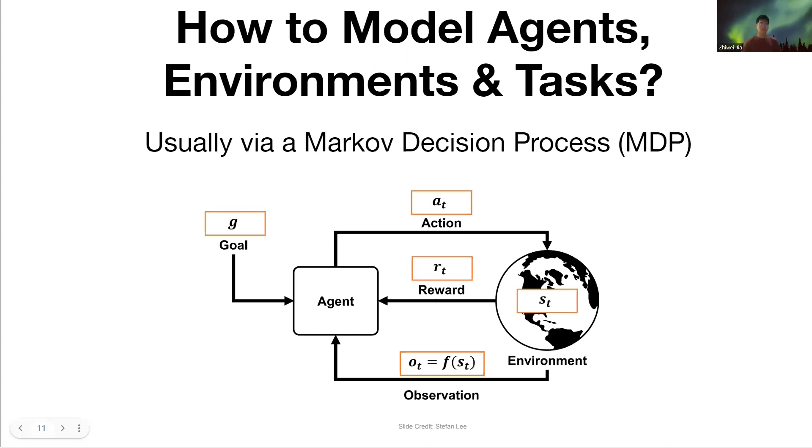For instance, in a navigation task, the rewards can be the minus distance between the robot and the target location. As you will see soon, many modern embodied AI work relies on the use of virtual environments. So let's ask a question. Why do we need virtual environments? Well, it turns out that learning in virtual environments has several major advantages over learning in real world.

It is much safer to perform experiments in virtual environments. And it is much more affordable and therefore scalable to train agents in virtual environments. For instance, it is very risky to collect self-driving car data in real world. And it is not very affordable to have hundreds or thousands of physical robot arms, which is easily available in simulated environments.

Okay, now that we know why we should use virtual environments to study embodied AI, let us go through some of its key factors. We will first start with simulators. So what is a simulator? A simulator is essentially physics simulation plus sensory signal rendering.

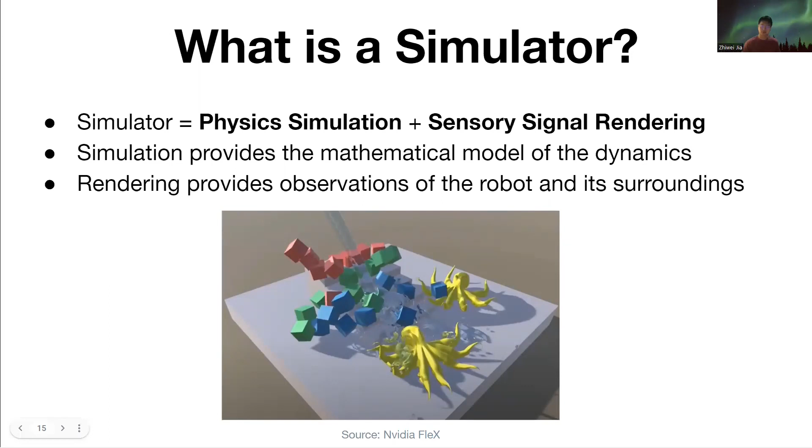Well, there are so many existing simulators used for embodied AI research. To make your life easier, we would like to introduce several important things for you to consider when choosing a simulator to use. These factors include rendering, physics, speed of the simulators, their supported object types and properties, how they model actions, and also what kind of human interfaces they can support. We'll go through these factors one by one.

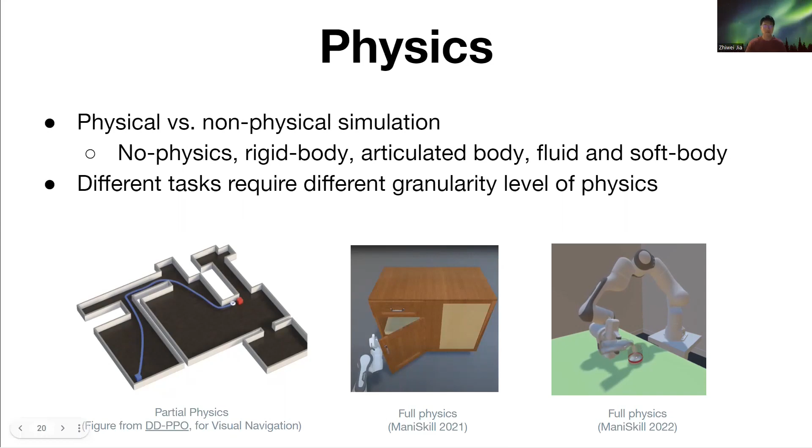Another important factor is speed, which refers to how fast the agent can interact with a simulated environment. This is quite important because it can affect what kind of training approaches are viable for the simulators. For example, you can do imitation learning with very slow simulators because it does not require a lot of interactions.

While you can do model-based reinforcement learning with relatively slow simulators because the agent can use its internal world model to reduce dependency on interactions. But for model-free reinforcement learning approaches, it usually requires you to have a very fast simulator since you're gonna need a lot of simulation, a lot of interactions.

So you might be curious, what are the factors that can have an impact on the speed of simulators? Well, the most obvious one is, of course, the speed of the underlying engines. But there are actually other factors that make optimizing or estimating the speed of a simulator quite tricky. For example, how complex the geometry is in your environment can have an influence on the simulator speed.

Is the interaction of a coarse or fine level? For example, a high-level action is much faster to simulate than a low-level action. Or even, what is the resolution for the rendered images? Typically, a larger resolution can slow down the simulation by a lot.

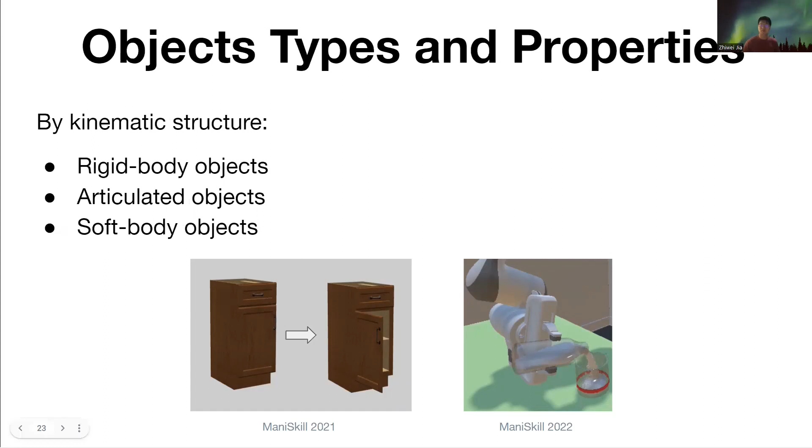Another example is peeling or cutting properties of food or materials in general in VR kitchen. And you can see there is actually a fine level of state changes here. Finally, the example of temperature modeling is provided in the iGibson 2.0 environment.

After introducing the actionable properties of objects, let's finally talk about the actions themselves. So the types of actions supported in a simulator sort of depend on 3 different things: the types of simulation, the types and properties of the objects, and also the types of the robots. So we've already covered the first 2 points in the previous slides. Now let's talk about the third one, the robots.

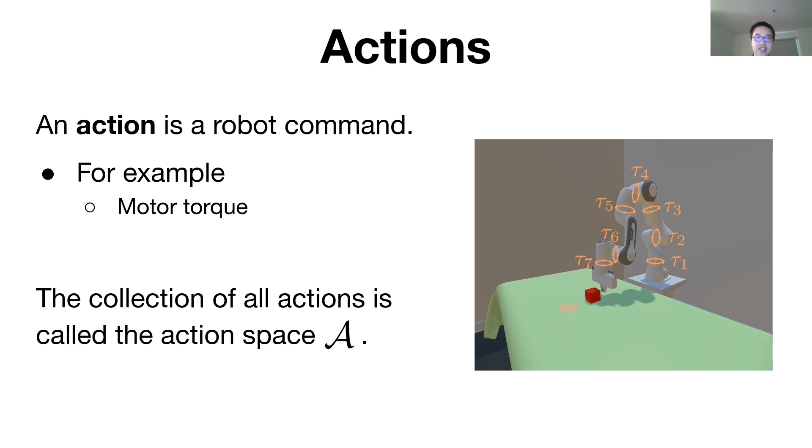Similarly, we define the robot command as an action. For example, here, the action can be the motor torque, which is used to control the robot. We call the collection of all actions the action space A. Next, we can also use a transition function T to describe how state changes over time according to an action. Formally, T describes the rate of change of the state, given the current state and action. In our robot example here, T is governed by classical mechanics.

The two examples have shown us that we can model the world with the three tuple S, A, and T. We call this the forward model. S is the state space, which includes all possible world states. A is the action space, which includes all possible control signals. T is the transition function, which describes the environment dynamics.

For what we have seen so far, the states are changing continuously, but on a computer, things are discrete. Here, we can discretize the transition function over time. Now, we can write s_t+1 is equal to a discrete time transition that takes s_t and a_t. And in general, the transition can be stochastic. That is, the transition function gives the distribution of the next state instead of a deterministic one.

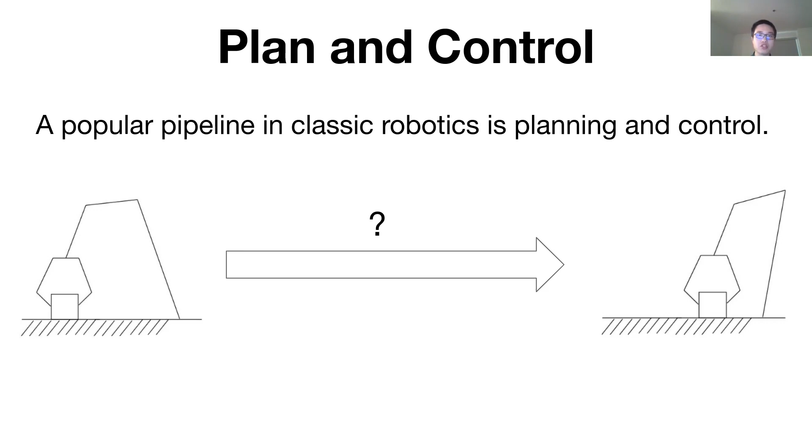Now, let's move on to classic robotics. A popular pipeline in classic robotics is planning and control. For example, if you want to move a block from the left to the right, we will first use motion planning to generate a trajectory, that is, a position, velocity, and acceleration sequence of the robot. We will then use control to execute this trajectory.

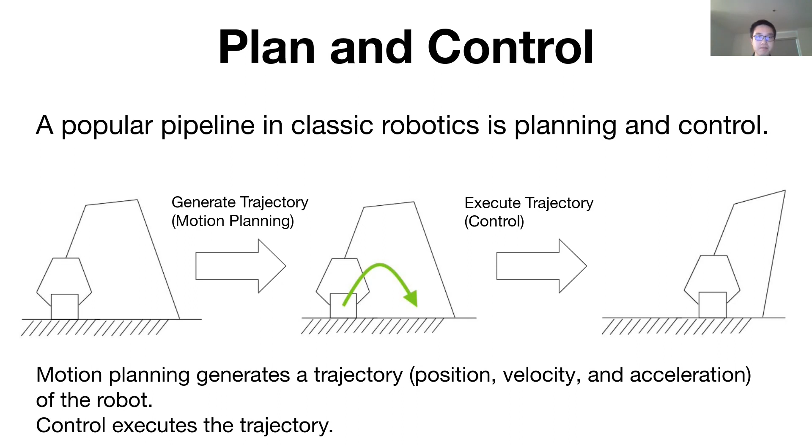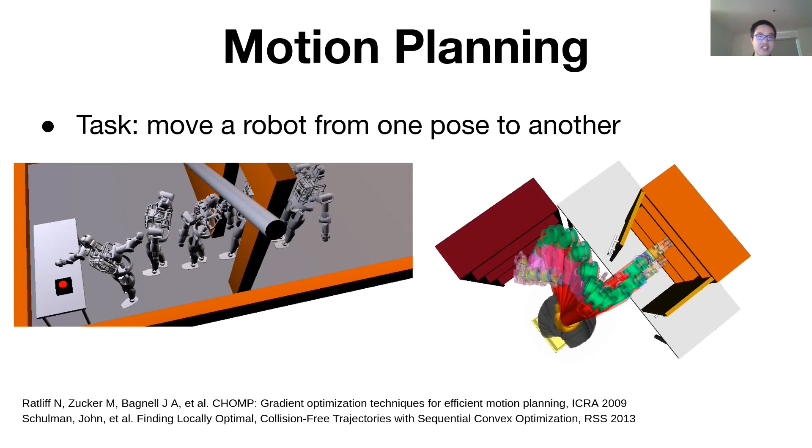Let's first talk about motion planning. Motion planning tries to solve the task of moving robots from one pose to another. In motion planning, we assume that we know the start and the goal of this robot. We also assume that we can verify if a random pose is valid. That usually means collision-free. We also need to be able to verify whether a pose is reachable from another pose using some simple control strategy.

Common algorithms of motion planning include the Rapidly-exploring Random Tree algorithm, or RRT, and the Probabilistic Roadmap Method, or PRM. Next, I'll take PRM as an example. This is a two-phase algorithm. The first phase is map construction. We will first randomly sample collision-free configurations, then connect every sampled state to its neighbors, and also connect the start and goal state to the graph. The second phase is the query phase. Here, we can just find a valid path using some simple search algorithm like Dijkstra.

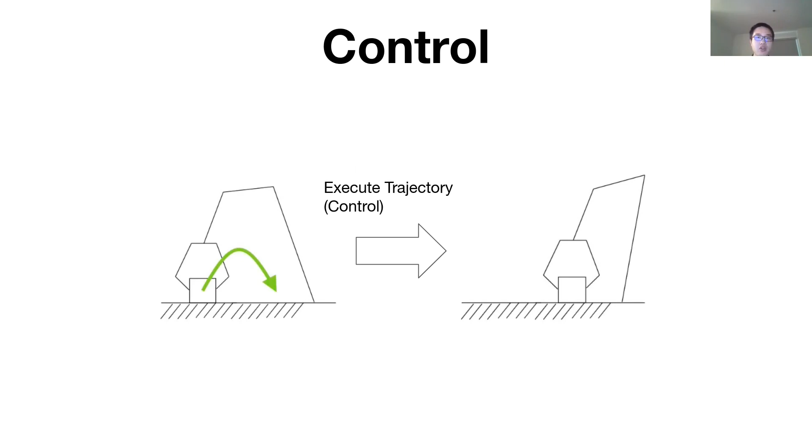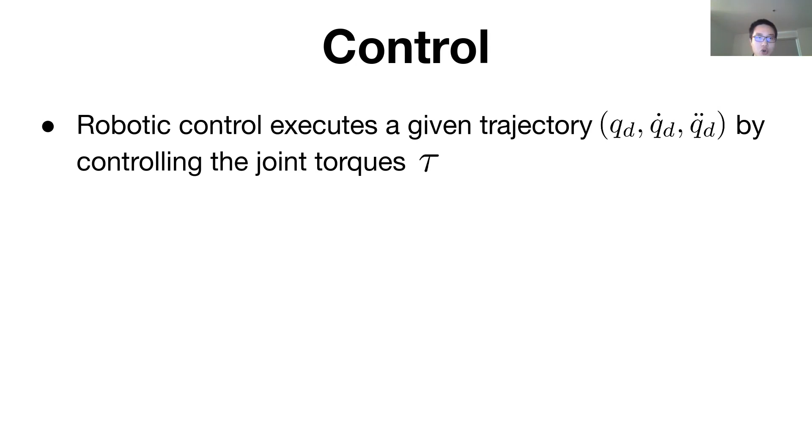With the trajectory generated, we are now ready for control. Robotic control takes a given trajectory and tries to follow it by controlling joint torques tau. Similar to F equals ma, the dynamics of a robot is known.

The process of inferring joint acceleration from joint torque is known as forward dynamics. And the process of finding the proper torque from desired joint acceleration is called inverse dynamics.

We can see inverse dynamics consists of 3 terms. The first term is similar to F equals ma, but here M is replaced with the inertia matrix. The second term only has effect when the robot has non-zero velocity, modeled by the Coriolis matrix. The third term summarizes effects of external forces, such as gravity.

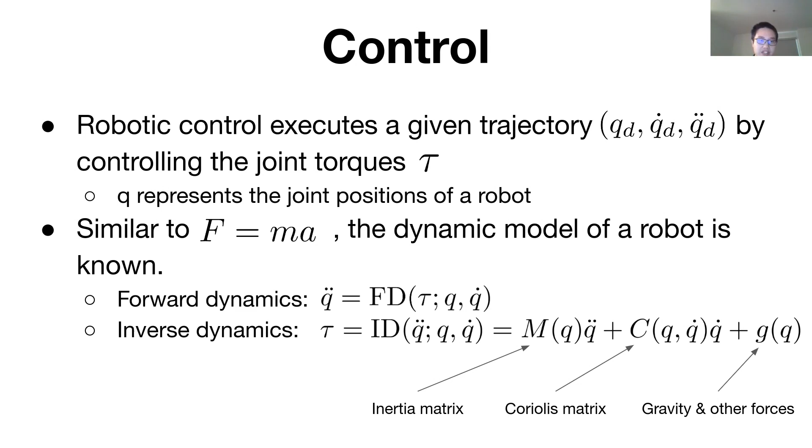Now we know the desired acceleration from the trajectory, and we have the formula for inverse dynamics. Ideally, by computing tau from the desired acceleration, we should get a perfect trajectory. However, the real world is not perfect. So what if there's some error on the joint position?

To mitigate this error, we can use another control method called PD control. In PD control, the applied torque is proportional to the velocity error E dot and positional error E. Intuitively, when the position lags behind, we just increase torque to catch up with the position. And similarly, if the velocity is too slow, we also increase the torque to catch up with the velocity.

We can see that here, inverse dynamics is not used at all. So is there any problems? Well, it turns out that the PD control does not guarantee the convergence of E. And even when the error converges, it is often non-zero.

The way to fix it is by combining both inverse dynamics and PD to form the augmented PD control, where PD is only used to mitigate the residual error from the inverse dynamics controller. The augmented PD control will converge to zero error if the robot is modeled correctly.

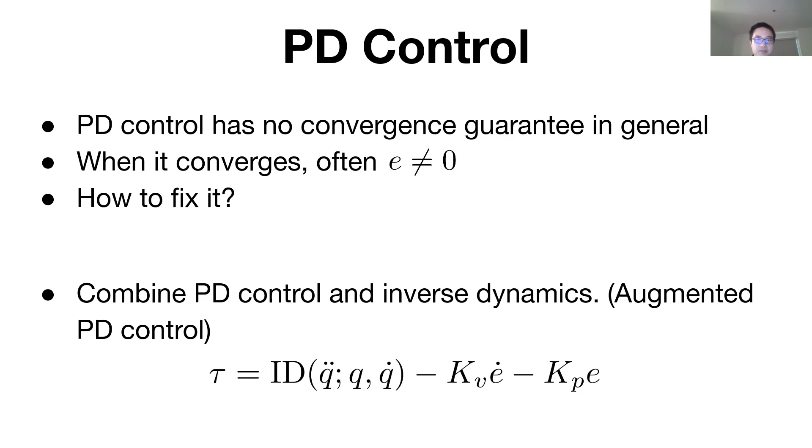Another way to correct any steady-state error is by adding an integral term to the PD. This is called the PID control. And there is also the augmented PID controller, which is more tolerable to inaccurate modeling of the inverse dynamics.

Now let's see an application of PD controller in embodied AI environments. You may hear people say that their environment uses a PD velocity controller. What does that mean? It really means that we are trying to use a PD or augmented PD controller to follow a constant velocity trajectory.

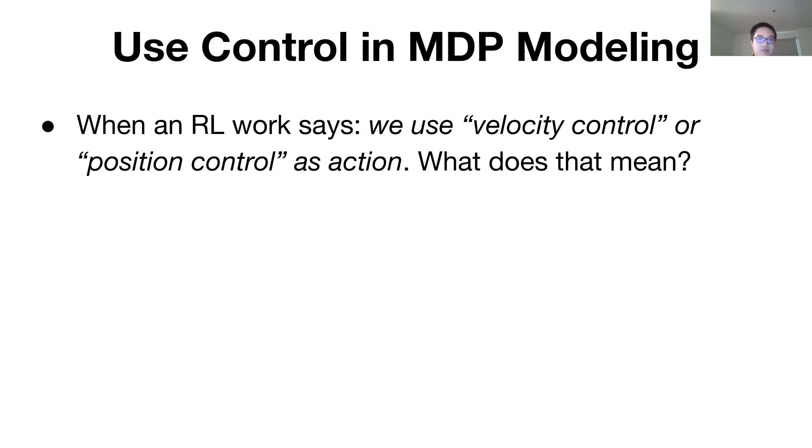Control can also be used in MDP modeling. You may see in the RL paper claim we use velocity control or position control as an action. What does that mean? Here, they're really saying the action in the MDP is target joint velocity or target joint position for a controller.

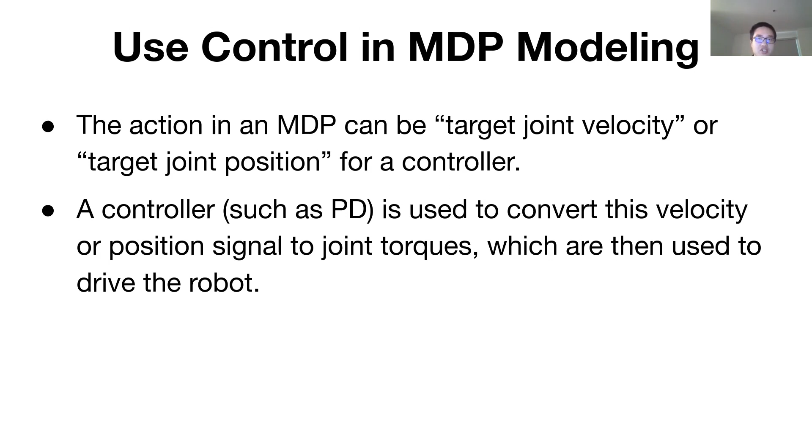A controller such as PD is used to convert this velocity or position signal to joint torques, which are then used to drive the robot. They make this design choice because velocity or position may be a better choice for MDP action due to learnability and sim-to-real transferability.

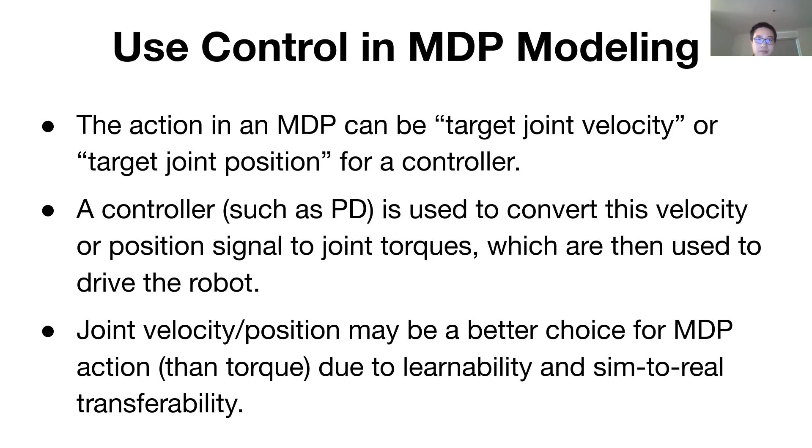To conclude the control part, I'd like to mention that control is a huge topic. Most control methods focus on the stability and robustness. There are many branches, such as optimal control, feed-forward feedback control, robust control, self-organizing control, and stochastic control. Optimal control also has a strong connection with reinforcement learning.

Okay, let me summarize embodied AI approaches here. First, there are learning-based methods, including imitation learning, which uses expert demonstrations, and reinforcement learning, which improves policy with interaction experiences.

Next, in classical robotics, we have introduced motion planning, which moves the robot between configurations, and control, including PD controllers and its variants.

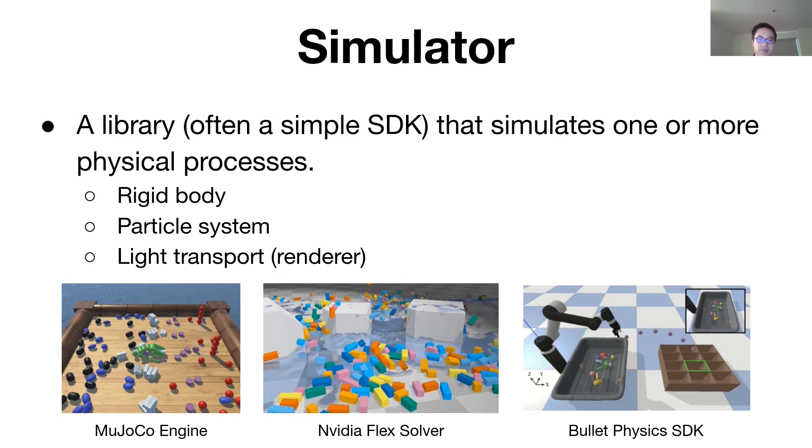Next, we call a software that bundles together simulators to help developers an engine. For example, the game engine Unity, Sapien, and PyBullet. Many people do not make the distinction and would call all these engines a simulator.

Next, when we say environments, what we really mean is bundles of engine or simulator assets and tasks for studying specific embodied AI problems, such as AI2-THOR, ManiSkill, or AI Habitat. Do note that many people will still call environments simulators. So the real content of a simulator really depends on the context.

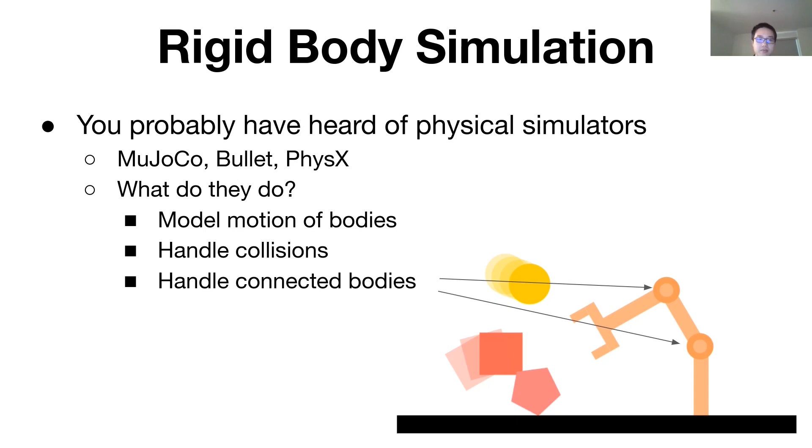In fact, most rigid body simulators repeat the following steps: integration, collision detection, and constraint solving. These steps happen within the step functions of simulators, such as PyBullet's step simulation function and Sapien's scene step function. Let's take a look at them in detail.

First, integration refers to advancing the simulation time and updating simulation states. A very common choice is the semi-implicit Euler integrator. That is, update the velocity with acceleration and update the position with the new velocity.

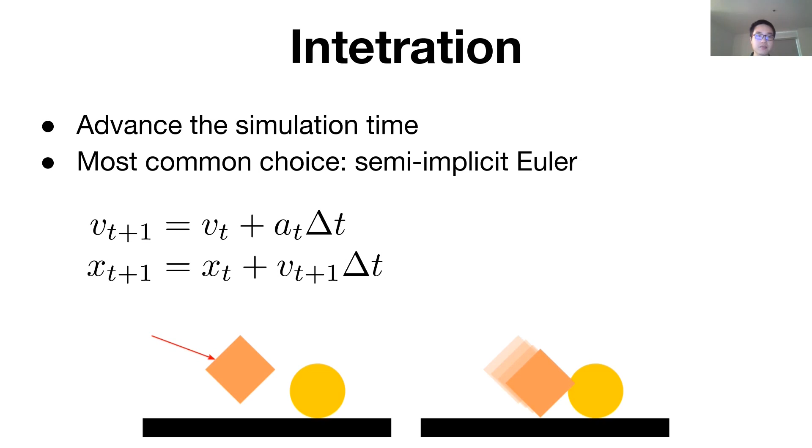Collision detection refers to the process of finding contacts between bodies. The collision detection algorithm finds the contact positions, normals, and penetration distances, then adds them into the list of constraints for the solver later. The collision module is often completely separated from the constraint solver module.

The constraint solving makes sure no physical restrictions are violated. For example, bodies connected with joints should move correctly, and bodies in contact should not penetrate each other. The constraint solver solves a system of equations or an optimization problem to figure out a proper force or impulse to add for each constraint. A key parameter is the solver iterations, which indicates how long the solver is allowed to run, and can greatly affect the stability of simulation.

Next, let's talk about camera simulation. Camera simulation is achieved by rendering, which tries to model light transport. Important components in camera simulation are cameras, lights, geometries, materials, and textures.

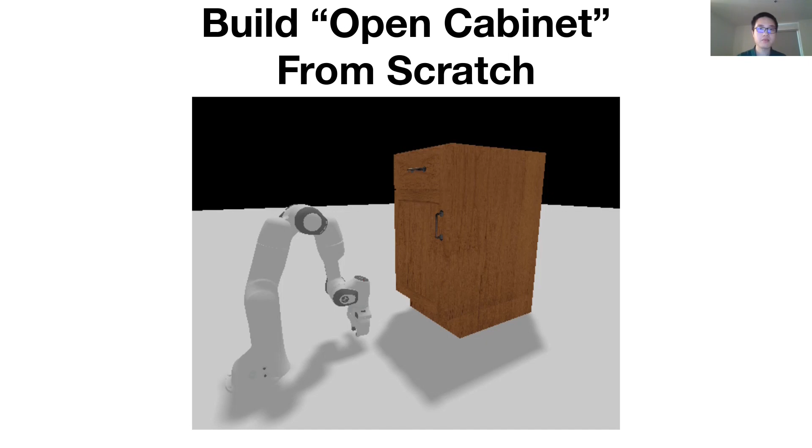First, we need to decide the task. Here, our task is to open the door of a cabinet with a robot arm.

Next, we need to decide the assets. We can use this cabinet and robot shown here. They are both in the URDF format.

Next is to decide the controller. The options include torque control, PD velocity control, a combination of controllers, or non-physical processes such as teleporting the arm. Here, we will show PD velocity control.

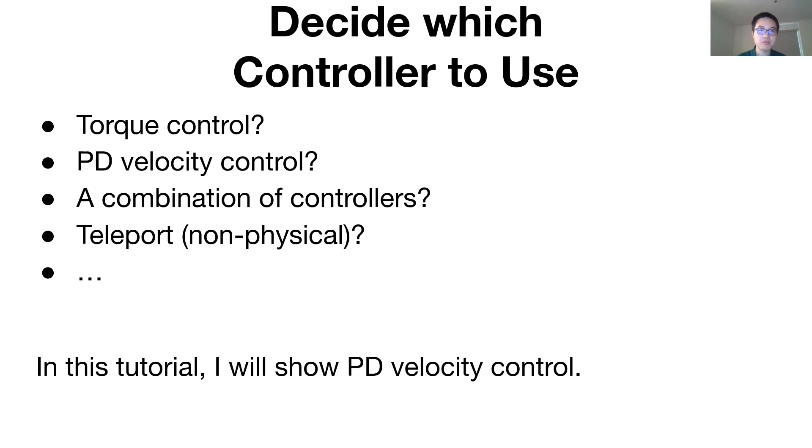Next, we decide the type of object interactions. How will the robot open the door? We can use physical processes such as force and friction. Or we can use a simplified model: glue the robot to the door when it is closed.

Or we can make the door opening even simpler: it opens automatically when the gripper is closed. The choice really depends on the scope and definition of tasks, and all the choices above can be useful in certain situations. Here, we will show the physical process.

Next is to decide the observation space. Should we use some simulation state? Should we use an RGBD camera? Or maybe both? Here, we will use the RGBD camera plus the robot state.

The next step is to choose a suitable framework. Here we use Sapien. First, because we made it, and it has a very good debug viewer. It also has a clean API, type hints, and code completion. So it is very suitable for education.

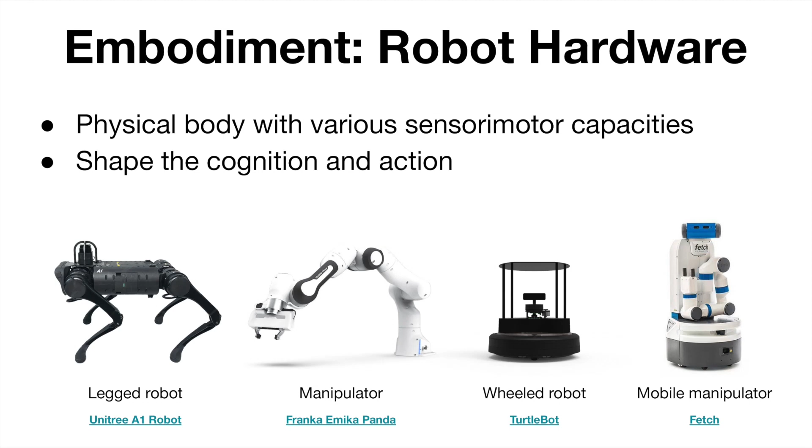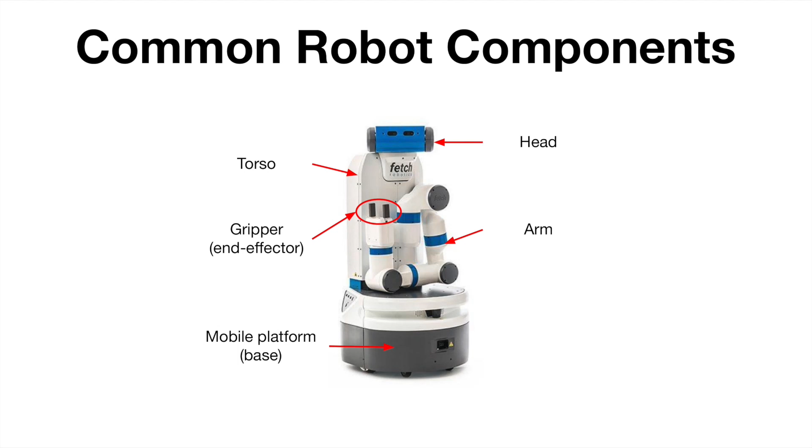Take the mobile manipulator Fetch, for example. It consists of a mobile platform, a head to mount cameras, a torso that can lift, an arm with 7 degrees of freedom, and a 2-finger parallel gripper.

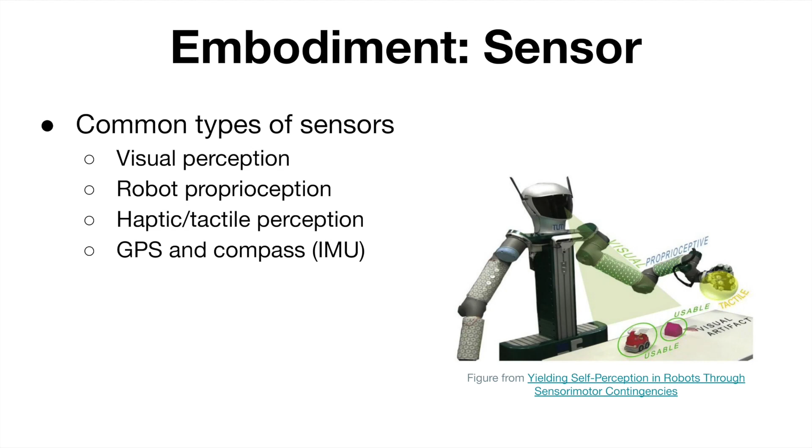Next, we will discuss sensors. There are several common types of sensors. For example, a robot can use mounted cameras to perceive visual information. It can make use of its motor drives to perceive the movement of its arm, which is a kind of proprioception. And it can also leverage GPS and a compass to perceive its ego motion. If the robot hand is equipped with force sensors, it is able to perceive tactile information as well.

Visual perception includes RGB and depth images, semantic and instance masks. There are also other types, for example, normal and optical flow. Apart from types of signals, placement is also an important factor. Commonly, cameras are mounted on the head and arm of the robot, or at a fixed position relative to the robot base. Different camera placements can affect cognition. For example, the arm camera can provide a closer look at the target to manipulate, with less occlusion.

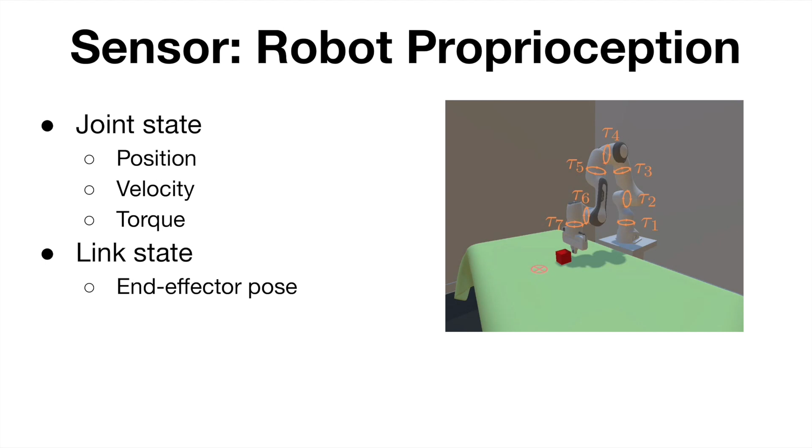Proprioception refers to perception or awareness of the position and movement of the body. It usually includes the joint states and end-effector pose. To manipulate objects, it's helpful to know the contact between the gripper and the object. We can check whether the gripper is grasping something by measuring the contact force in the simulation. There also exist force-torque sensors, which can measure external force and torque applied to a joint.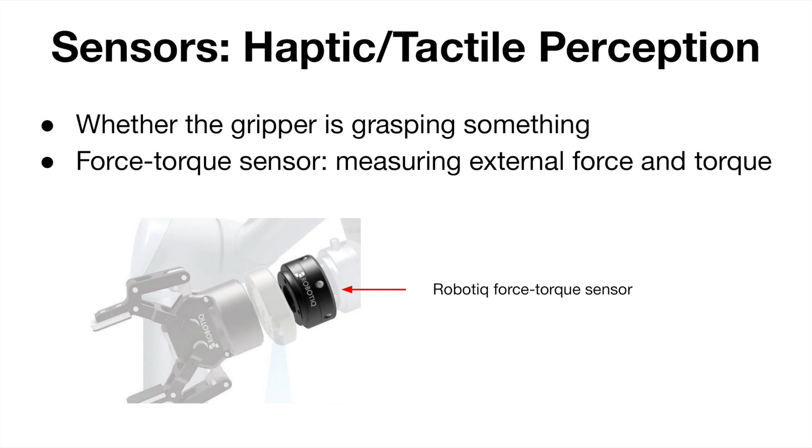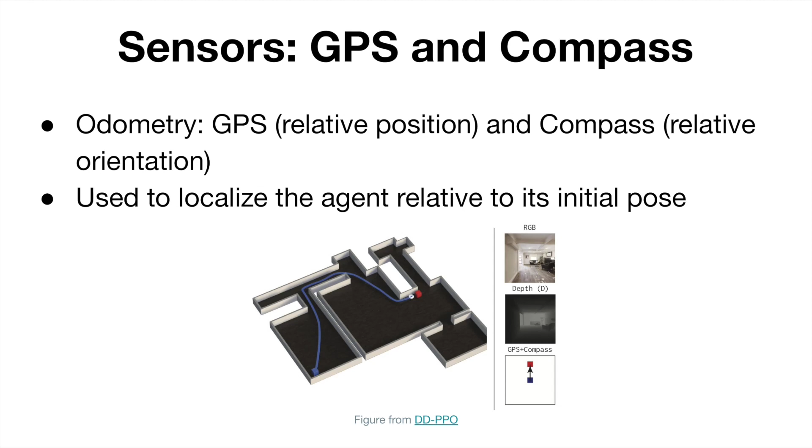GPS and a compass are widely used in navigation tasks to provide ego motion information. They enable the agent to localize itself relative to its initial pose. We summarize design choices for sensors here. We have briefly discussed the types and placement. In addition, specification is taken into consideration sometimes as well. An example is the camera resolution.

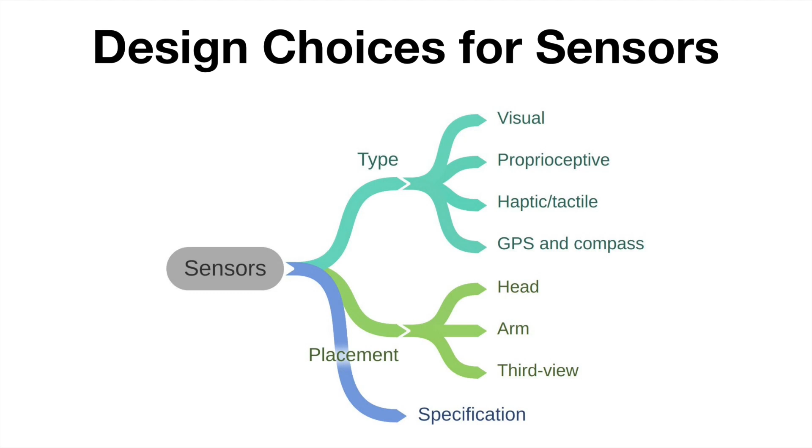Next, we are talking about actuators. An actuator is a component of a machine that is responsible for moving and controlling a mechanism or system. An actuator takes an input command from the agent and outputs commands to the simulator to control the robot. For instance, the input command is move forward, and the output command can be to set the base position 0.2 meter forward along the x-axis. Besides, the output command can be low-level physical signals. For example, 10 Nm of torque applied to the wheel joint.

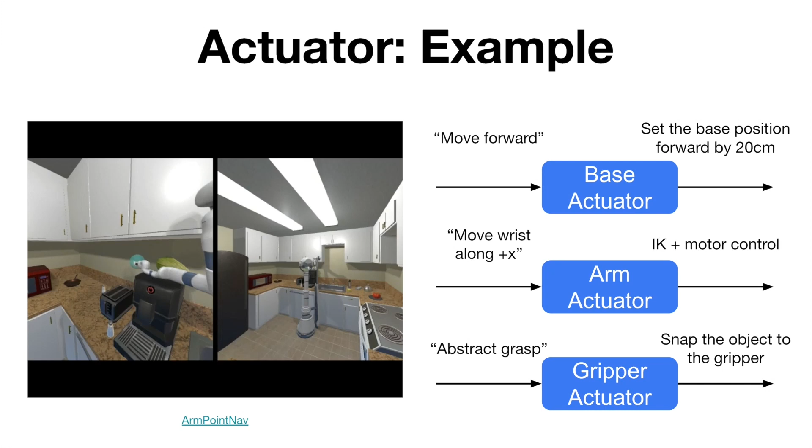Here, we show an example of actuators implemented in ArmPointNav. The base actuator takes a discrete action as input, say, move forward, and sets the robot pose to a pre-computed navigable grid position on the floor. This process is non-physical. Similarly, the arm actuator receives a discrete action, say, move wrist along the positive x-axis. It then computes the target joint positions by inverse kinematics and controls joint motors to reach those positions. The gripper actuator is implemented as a magnet, and the object can be snapped to the gripper if they are close enough. This process is non-physical as well.

Next, we are talking about task specification. It includes goal specification and how to define success metric. The task is considered completed if the goal is achieved. In general, the goal should be provided in or perceived from sensory information. We list several common types of goal specification, including geometric position, object category, semantic or instance masks, language instruction, goal image, successful demonstration. For example, a goal specified by a language instruction can be a sentence, say, find white mark. The agent needs to parse the goal, navigate through the room, and recognize the white mark.

We also need to design a success metric to measure whether the goal is achieved. For example, a navigation task is completed when the agent stops close enough to the goal, and a manipulation task is accomplished when the pose of the target object is close enough to its goal. Sometimes, additional requirements need to be satisfied, especially for manipulation. For instance, the robot should be static or successfully reset its arm.

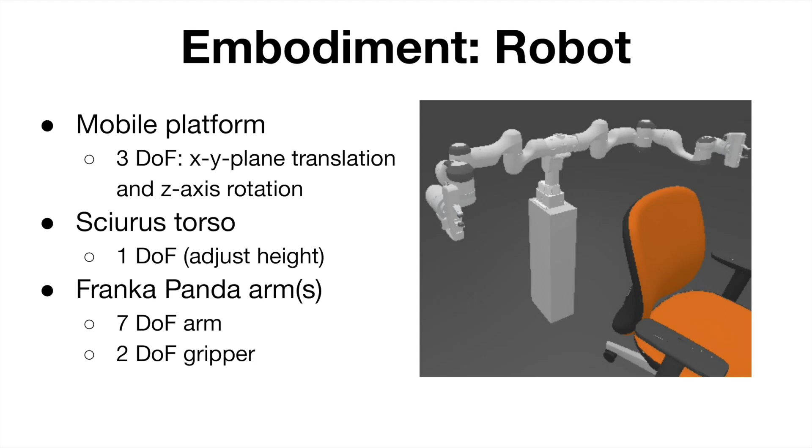RGBD images and semantic masks are provided. Specially, ManiSkill uses 3 cameras mounted on the top to provide a panoramic view. Other non-visual sensors include proprioceptive sensors for joint positions and velocities, as well as GPS and compass sensors for ego motion. Besides, it provides a point cloud fused from observations of all 3 cameras.

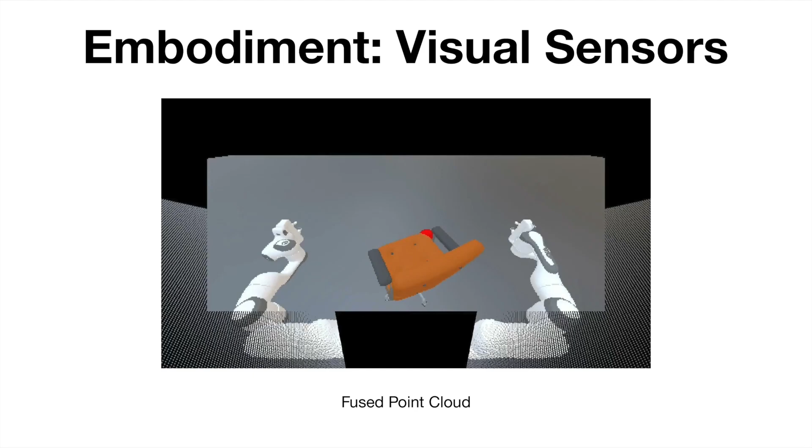ManiSkill uses a continuous action space, which corresponds to the target velocities of controllable joints. The actuator output is torques applied on joints to achieve those target velocities. Such an actuator is equivalent to a PD joint velocity controller in robotics. It relies on full physical simulation without abstraction.

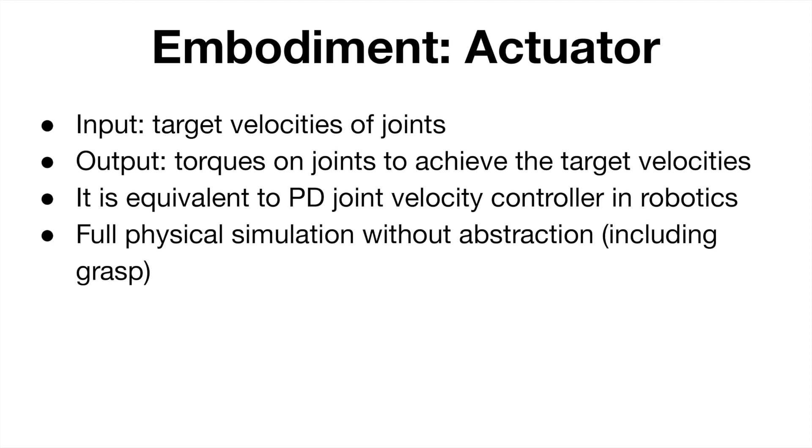ManiSkill introduces 4 challenging manipulation tasks. The first 2 tasks are open cabinet door and open cabinet drawer. The objective is to open the door or drawer. The target link is specified by the semantic mask.

The other two tasks are push chair and move bucket. The objective is to move the target chair or bucket to the goal position. The goal position is specified by a visual indicator, either a red point or a white platform. The agent needs to infer it from observations.

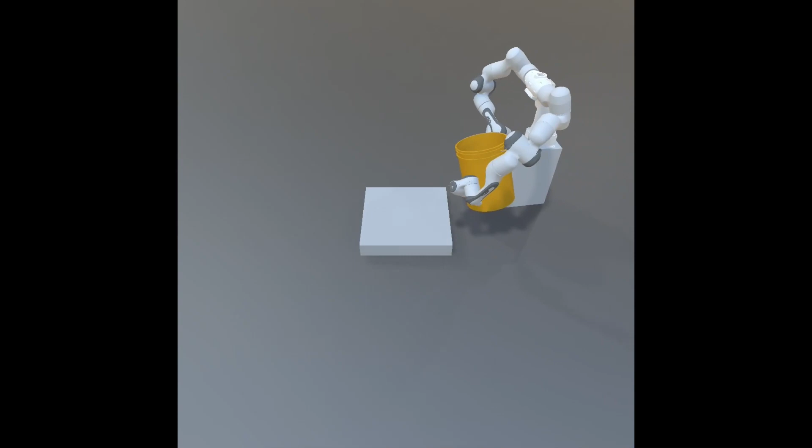ManiSkill uses 162 objects over 4 categories from the PartNet-Mobility dataset. Large diversity of articulated objects is one of its features. Moreover, we would like to discuss some soft body tasks beyond rigid body simulation. ManiSkill is going to introduce soft body-oriented tasks. The embodiment is the same, except for specially designed end effectors. We will focus on goal specification in the following slides.

The task Write is to write a target shape in clay with the stick mounted on the robot hand. The goal is specified by a top view RGBD goal image to indicate the target shape to write. The task Pour is to pour a certain amount of water into the beaker. A red marker indicates the desired fill level. The task Excavate is to excavate a certain amount of clay from the container with a mounted bucket. The target scooped mass is specified by a scalar.

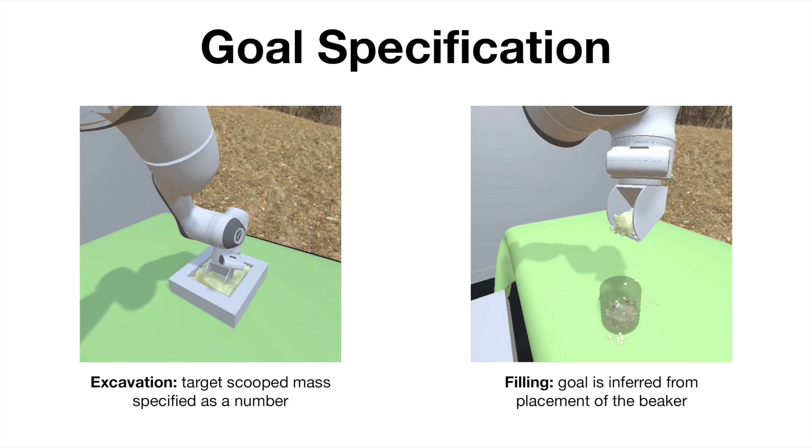The task Fill is to fill the beaker with some particles. The goal position to fill needs to be inferred from the placement of the beaker. The task Rolling Pin is to roll over dough to shape it into the target size. The goal is specified by a target bounding box of dough.

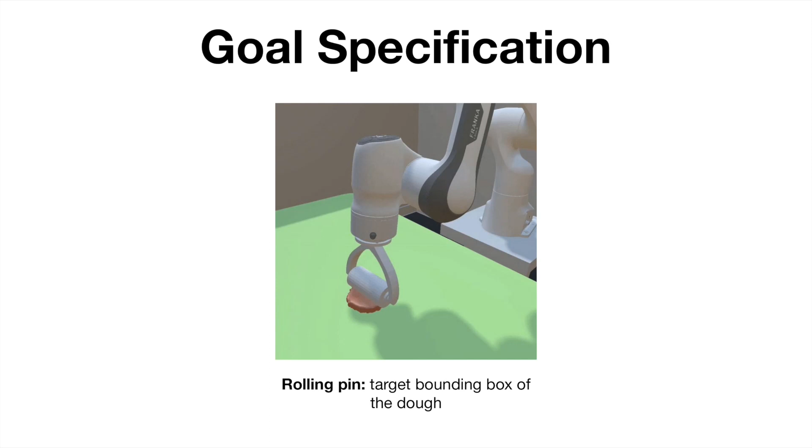To build a soft body-oriented environment in ManiSkill, we gather different types of assets, including customized robot end effectors and rigid body containers. Soft body assets are represented by particles, and their physical properties have been tuned to meet our expectations.

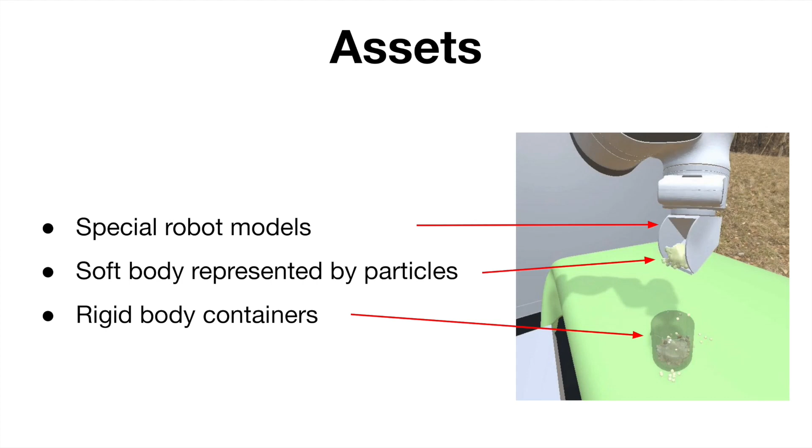To summarize, different embodied AI environments have different levels of abstraction about the physical world, and are suitable for different tasks. Habitat 1 and AI2-THOR are suitable for navigation and language grounding. Habitat 2 and ManipulaTHOR are suitable for mobile manipulation. ManiSkill focuses on physical manipulation and object-level generalization. We hope this tutorial will help you find a suitable environment to start your own journey with embodied AI, or have a better understanding about designing an embodied AI environment.

Hi everybody, welcome back to part 4 of the Building and Working in Environments for Embodied AI tutorial. In this part, I'm going to introduce the experiences and practices to debug simulators.

Simulations can produce many unexpected behaviors. For example, the gripper may penetrate the cube that it's trying to grasp. The robot may penetrate objects like the oven here. And some complex mechanical structures may be simulated incorrectly, like shown in the third picture. And for some objects, the collision shape may look very different from their visual appearances.

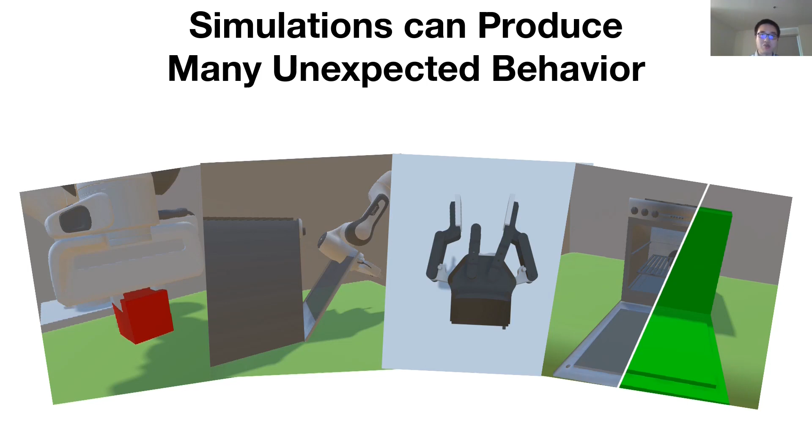In this section, I'm going to talk about how to debug and work with these kinds of issues and how to improve the environments. First, I'm going to talk about how to identify potential problems when a simulation environment behaves unexpectedly. Next, I'm going to talk about how to debug and improve these environments. This section is mainly for people with some experience in embodied AI.

This section is divided into 6 topics: conventions in robotics, simulation assets, physical solver, renderer, controller, and some comments on environment speed. Let's get into the first cause of common bugs, the conventions in robotics. Here, I will talk about 4 topics: quaternion representations, Euler angle representations, default coordinate frames, and joint order of different software and real robots.

So, quaternion representations. As you may already know, quaternions are very commonly used to represent the rotation of rigid bodies in simulators. But there are 2 very common conventions in use in popular software. The first is the XYZW convention, or vector-first convention, where the XYZ component is placed before the scalar component of the quaternion. This convention is used in ROS, PyBullet, PhysX, SciPy, and Unity. As you can see, they are all very popular software.

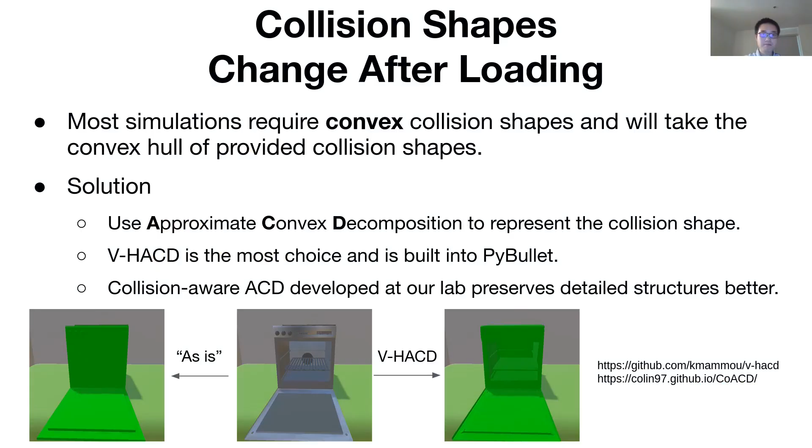Let's move on to the next issue that is caused by small mass or inertia. So sometimes a loaded object does not respond to any applied force or torque. And in this case, maybe it is because the mass or inertia of this object is just too small, and the simulator may choose not to simulate it, or maybe the floating point error is too large and the simulator cannot handle it.

Here, I have a script for that. I'm setting the density of this robot to be very low, so these two robot fingers would have an extremely small inertia. Let me try to drive these fingers. Here in SAPIEN, I can easily drive these fingers by sliding this slider. And as we can see, I'm trying to drive this finger, but it's not moving, and that's not expected behavior.

Here, I'm printing the inertia of those fingers. As we can see, they are very small. To solve this issue, we can simply try to increase the mass and the inertia to see if the object starts to behave. And I would recommend making the mass and inertia greater than the 1e-7 scale.

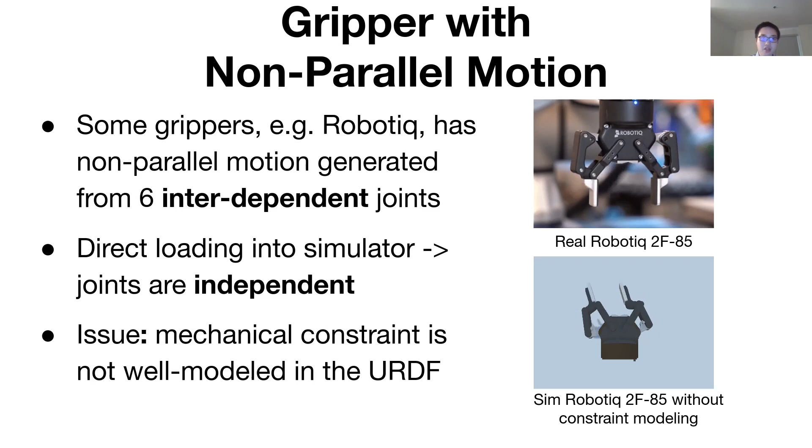So for these kinds of grippers, we will want to manually add some constraints after loading these models. For example, here, for this Robotiq gripper loaded in SAPIEN, we have manually added position constraints to connect the inner part and the outer part of the fingers together. So we can model these kinds of loop constraints correctly. However, do note that these loop constraints may bring a little bit of instability into simulators. So you should always be cautious about using such tricks.

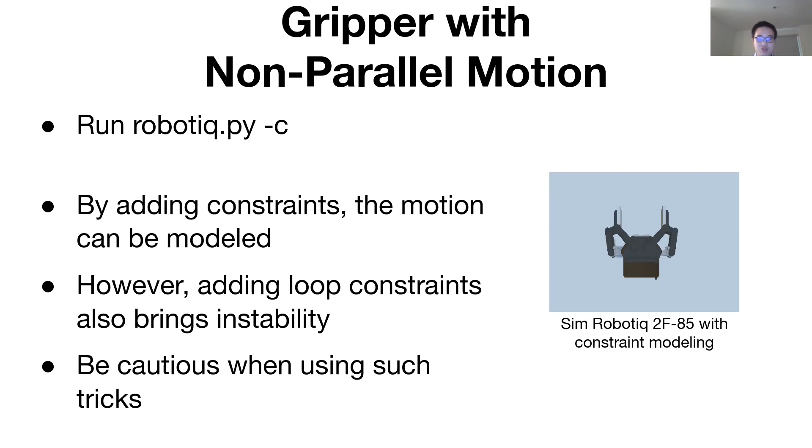And the next topic is about balancing passive force. We sometimes get the question: my robot never reaches target positions, are my PD controllers bad? Well, in this case, I would say the most common issue is that the users are using the PD controllers instead of the augmented PD controllers as introduced in section 2 of this tutorial.

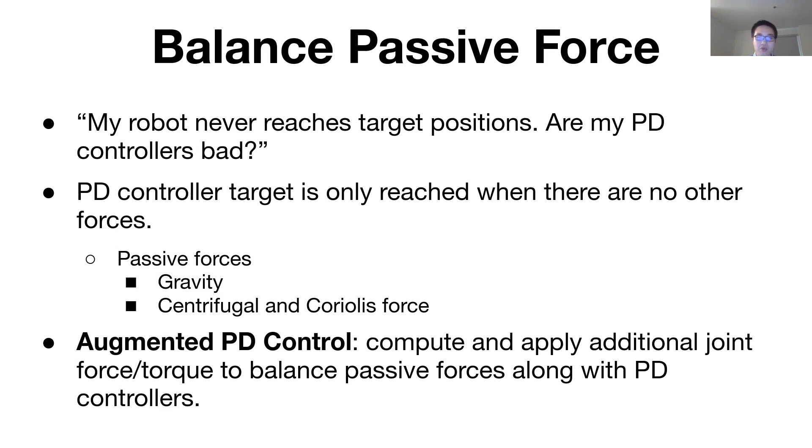For PD controllers, the target is only reached when there are no other forces. For example, when there is no gravity, there will not be any steady-state errors with PD controllers. But when there is gravity, we want to use the augmented PD control, where essentially we are applying additional joint force or torque to balance the passive forces along with the PD controllers. So in that case, simulators would be able to achieve a zero error state with the PD controllers.

The next topic is position controller and set position. Many people confuse these two ideas. For a position controller, we are really saying that we are using some sort of controller, like a PD controller, that takes the position signal and then outputs the forces and torques that are used to control the robot. This type of controller will respect physics. But when we say set position, we're really just teleporting the robot to whatever configuration we tell it to. In this case, the robot will reach the configuration no matter what, even if there is collision on the way.

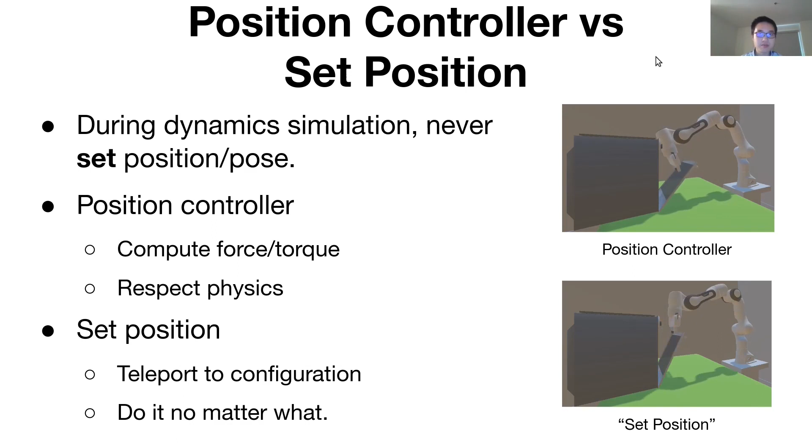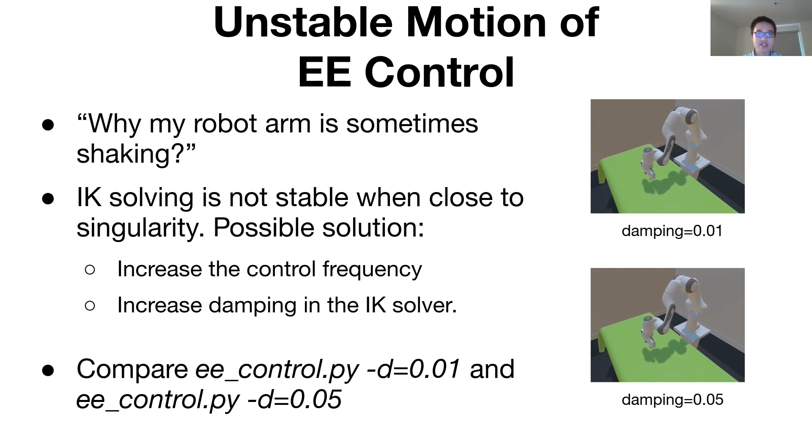Next, the joint limits in controller design. Sometimes the robot end-effector does not move as desired. Even if we tell it to move in a certain direction, it may not be able to do so. And this is often caused by the joint limits. Since most IK solvers or EE controllers do not consider joint limits, when the robot reaches a certain joint limit, the end-effector controller may not be able to move in certain directions. So in general, we should avoid reaching joint limits in the algorithm design.

And here, as we can see, we can use the SAPIEN viewer to see the joint angles of the robot and figure out which joints are at their limit. Okay, so finally, I'm going to give some suggestions on debugging or improving the environment speed.

Environment speed is a very common issue that comes up a lot. I would say in general, optimizing the environment speed is quite hard, so I will only give some general guidelines.

First, we should debug the environment speed in a single process or single thread to avoid unnecessary complications. Second, I would suggest using a profiler. We need to profile the following things: the total time for stepping the simulation, the total time for doing the rendering, the time for expensive planning or network evaluation, and of course the time for the other things in the code.

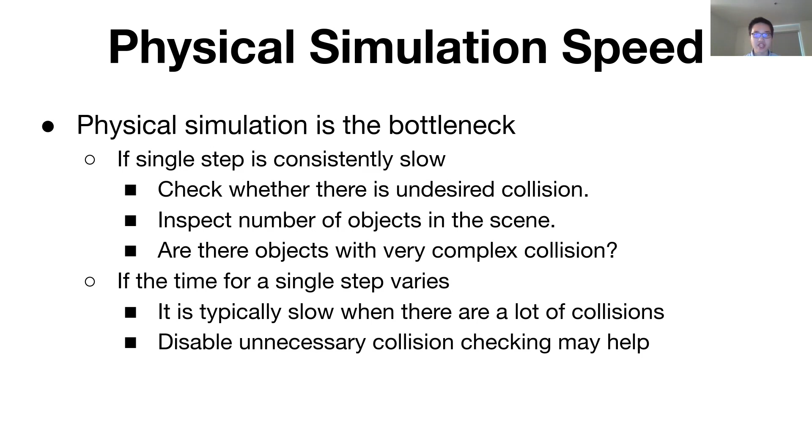To summarize, in this section we've seen some tips to debug problems in conventions in robotics, simulation assets, physical simulator, renderer, controller, and I've given some tips on the environment speed.

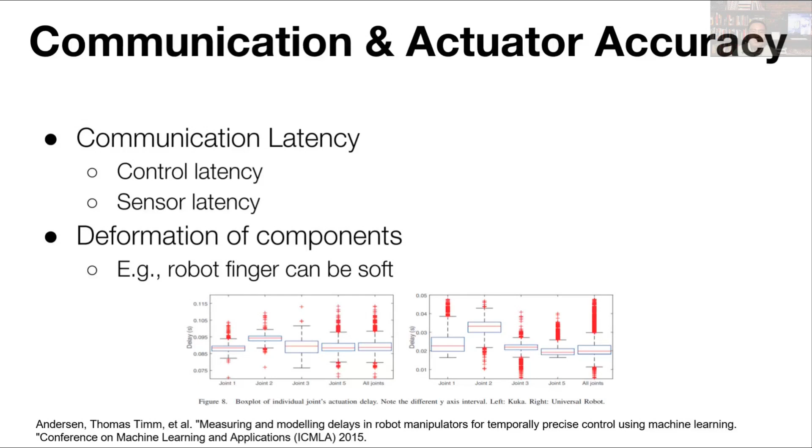Another factor usually not modeled in simulation is the deformation of robot components. For example, the robot fingers may deform during grasping, which will influence the grasp stability. Another important factor is sensor noise.

For proprioception, the joint positions of real robots are acquired from encoders and are usually accurate, but the joint velocities are computed from differentiation and are usually noisy. For some real robots we can get joint torque signals, but there could be a large sim-to-real gap due to the sensing technique in real. For environmental sensor noise, the difference of visual signals between simulation and real will significantly influence the transferability of visual policies. I'll introduce it in detail in the second part.

When we build a simulation environment, we always introduce some kind of model simplification for computation efficiency. So there are phenomena not modeled in the simulator that will cause a world model mismatch. For example, jerk is the rate of acceleration change. Due to the power limit of real robot actuators, the maximum value of jerk is limited, but most robot simulation environments do not consider this limitation. However, it can be an important factor for high dynamic scenes.

Besides the physics model, the geometry and dynamic parameters can also be different between sim and real. Some of these errors can be eliminated through system identification.

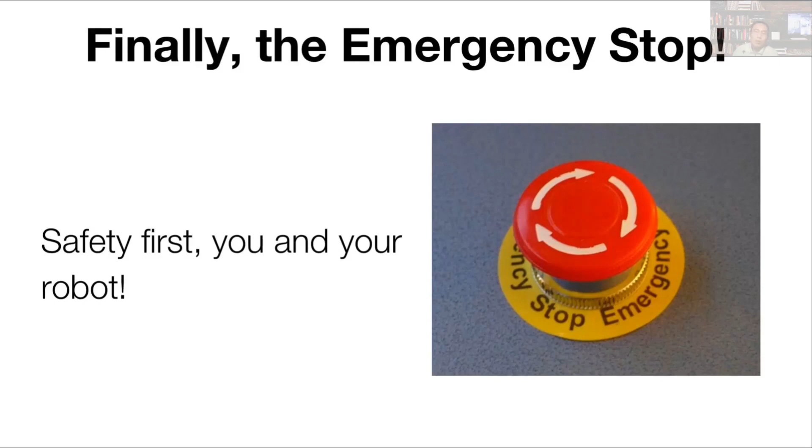Today, for the audiences at CVPR, I guess most of you are interested in using visual signals as input. Compared with RGB images that are widely used in different CV tasks, depth maps from 3D sensors contain geometry information of the scene, which is important for Embodied AI's interaction with the world. So for the second part, we will focus on real and simulated 3D sensors.

In order to understand the source of domain gap of depth signals, we need to first understand the mechanism of real 3D sensors. According to working principles, commercial 3D optical sensors can be divided into depth by triangulation and depth by time of flight. The triangulation method includes passive stereo vision, active stereo vision, and structured light.

Triangulation methods derive the depth of a target by finding correspondences in observations from different perspectives. The correspondences can be derived in various manners. For passive stereo vision, the correspondence is derived by using photo consistency, therefore it requires textured surfaces and cannot handle textureless objects. Active stereo vision sensors overcome this weakness by actively projecting a particular pattern onto the object surface. For structured light sensors, the correspondence between the camera and the projector is established by decoding the captured patterns.

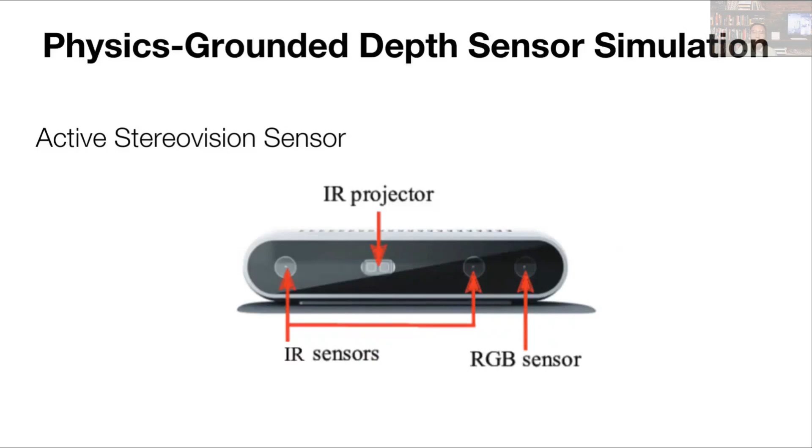In DepthSynth in 2017, they first rendered the stereo IR images by rasterization and performed stereo matching on the rendered images. It can simulate the error caused by stereo matching, which narrows the sim-to-real gap for normal objects. But since it uses rasterization for rendering, it cannot simulate the complex light transport phenomenon of real transparent and translucent objects.

But are a physically accurate ray tracer and a realistic noise model enough to close the sim-to-real gap of depth maps? The answer is no. According to the rendering mechanism, the lighting and the object material have significant influence on the rendering results. So we need to acquire the lighting and object material of the real world to further close the sim-to-real gap. After all this work, we could generate simulated depth maps with very small domain gap.

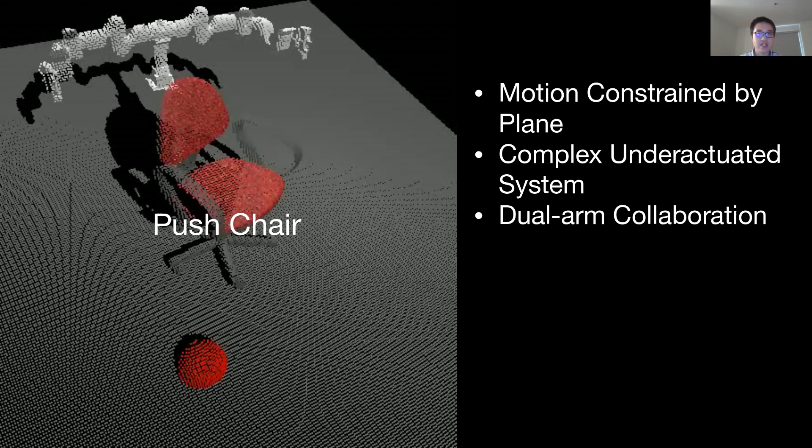Then, let's go to the second important feature of ManiSkill, diverse objects, which are necessary for learning generalizable manipulation skills. Most existing robot learning environments usually lack the diversity of 3D assets. So we have included a large variety of 3D articulated objects in our benchmark, with 162 objects over the 4 tasks in total. Each object is processed and verified to support manipulation.

The third feature of ManiSkill is egocentric 3D visual input. ManiSkill supports 3D visual inputs via point cloud or RGBD, which are captured from a simulated panoramic camera mounted on the robot. The 3D visual inputs allow various computer vision models to be applied.

Lastly, we have also provided a large number of high-quality demonstration trajectories. For each training object of each task, in total, there are around 36,000 demonstration trajectories and over 1.5 million 3D video frames. With these demonstrations, researchers can spend less time on collecting good trajectories and instead focus more on other interesting aspects of the problem, such as network designs and learning algorithms.